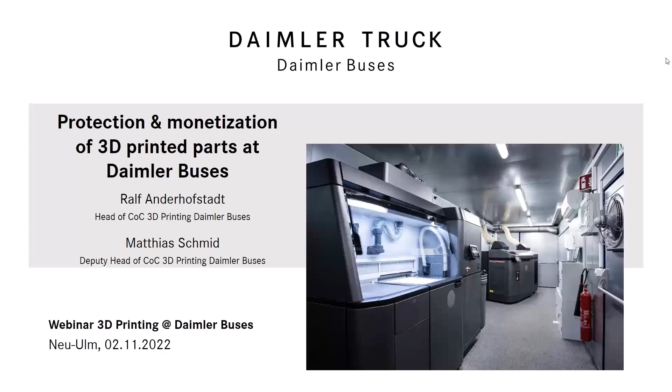Maybe I should start with what is the Daimler Truck AG? By the end of 2021, the former Daimler AG split into 2 independent companies. On the one hand, now we have the Mercedes-Benz Group AG for luxury passenger cars. And on the other hand, we have the Daimler Truck AG for commercial vehicles, with a clear and sharpened focus on transportation and transportation customer needs.

As the world's largest and globally acting OEM for commercial vehicles, we know about our global responsibility regarding sustainability, and it's our vision and ambition to be leading in sustainable transportation, and not only in transportation, but sustainability itself.

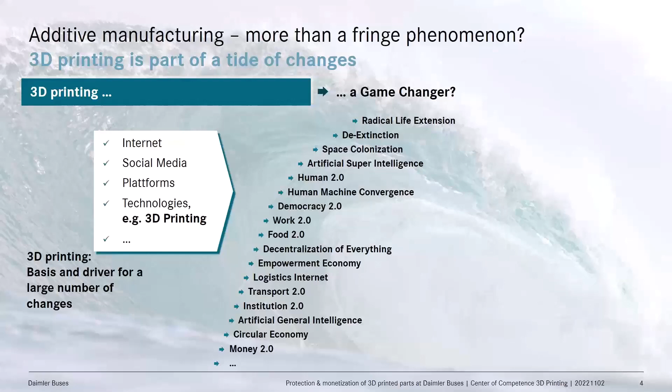How does that go along with 3D printing? Nowadays, we see a huge tide of changes in society, either in the way we live, the way we work, or the way we think about many things. For some of those changes or megatrends, industrial 3D printing, or I think additive manufacturing is the better expression, is basis and driver. It's way more than a fringe phenomenon, especially for decentralization of everything. In our case, for the decentralization of production or transport 2.0, to name just two of them.

And this offers lots of benefits. Industrial additive manufacturing helps companies save a lot of time and money because of the short manufacturing time and the toolless production. It's possible to produce parts on demand. For example, the average spare part can be produced within 24 hours, which helps you reduce your stock. Also, you can produce parts without minimum quantities, which is a huge economical benefit. And if you decentralize your production, you can also reduce transports and much more.

Now that you know the key advantages and possibilities of additive manufacturing, I would like to give you a short overview of our center of competence before we deep dive into the decentralized production.

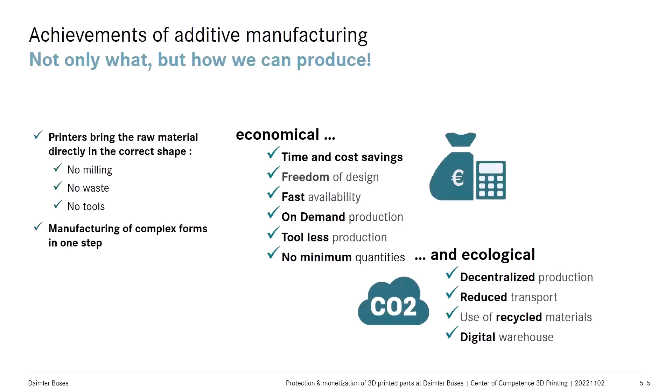At Daimler Buses, in our center of competence, we have a core of 6 teams that work after the Scrum method and cooperate with a cross-functional project team with over 30 different entities. For example, the legal department or tax department, IT, design department - the end-to-end product life cycle is covered.

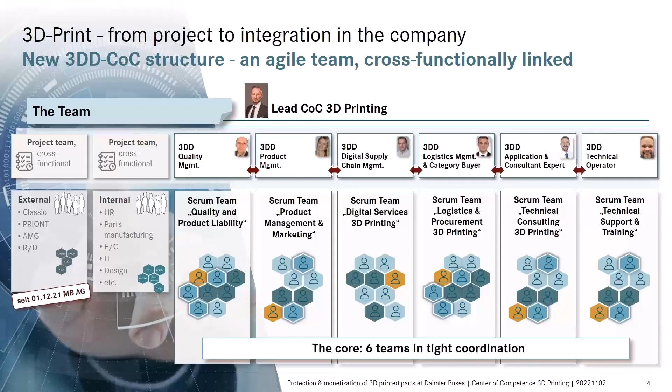Since we started with additive manufacturing back in 2016, we had one target: to establish and expand a new business model.

For integrating 3D printing at Daimler Buses, we followed the approach: think big, start small, and move fast. We had to recognize the whole potential of industrial additive manufacturing, and then find the right application to solve an existing problem or a problem which will arise in the near future.

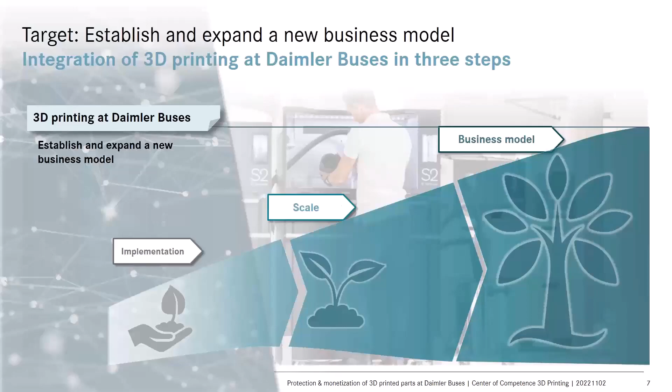And one thing that we identified was a new digital business model by decentralizing the production.

We give our customers the choice. They can still order a spare part like they're used to, or they can order a license and print the parts themselves. Or if they don't have their own printer, one more interesting opportunity is that our customers can get the parts printed by a printing service provider nearby their workshop, for example.

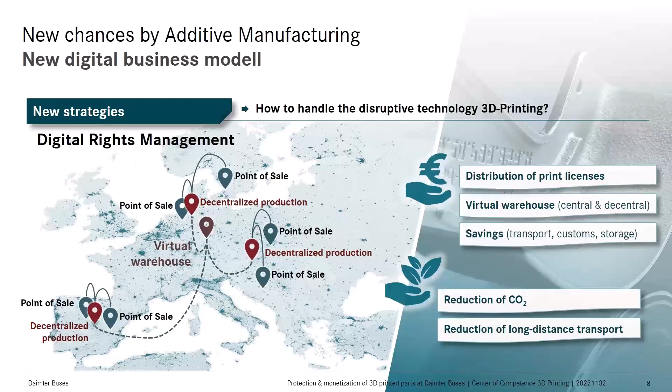So you can avoid long distance transports, can reduce carbon emissions by distributing print licenses instead of spare parts. But what does that mean for our existing supply chains?

This is a classical model of the existing supply chain with the normal stakeholders and roles. Start with the OEM, which is the IP owner, and the tier 1 supplier, which is producing the parts, ships it to the OEM. We, the OEM, are shipping the parts within our service organization, for example subsidiaries or dealers, which resell the parts to our consumers, to our customers.

So the tasks in this whole supply chain are pretty similar to each other, and the challenges for each stakeholder also. But by analyzing the supply chain, it's not important which is the stakeholder - what you need is the roles. So we identified for us 5 supply chain models.

As you may see in the blue box, we have classical physical supply chains, where after a spare part is produced and handed over to another stakeholder in the supply chain, there's always a physical transport. This is why we talk about physical supply chains.

For the future, we identified digital supply chains, where we send, for example, CAD files, or our intellectual property to a dealer or a customer that produce the parts themselves. In the best case, our producer and consumer are one and the same person - we call it the prosumer.

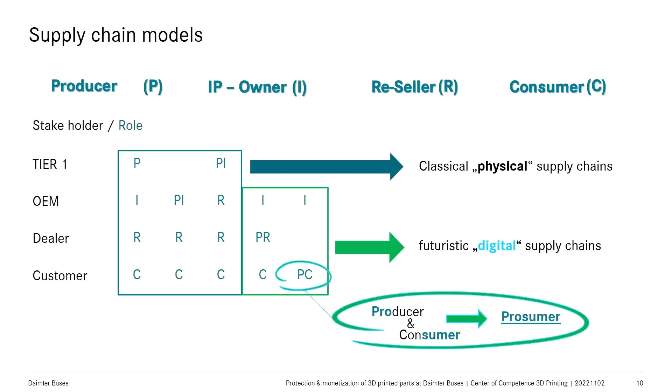On the first look, it seems like our prosumer model is really only interesting for the IP owner, because he can reduce running costs for his service organization by eliminating a reseller or a whole distribution level. But it's not only the IP owner that benefits from it.

Also, our consumer has a lot of advantages to this, because his parts are longer available - because if you have the relevant data and license, you can print the parts for several years, as long as you have a certified printer.

You have more impact on prices that you can achieve, because you don't have to pay all the stakeholders in the supply chain.

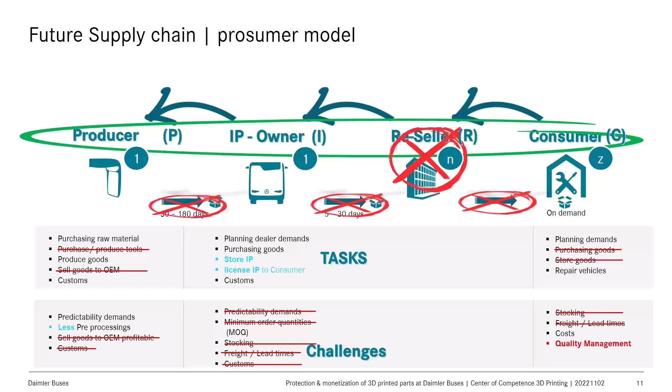One problem or fact is that supply chains are trust-based. In the standard supply chain, you have a one-on-one relationship between producer and IP owner on a contractual basis, and the IP owner or OEM normally has a contractual basis with his resellers. So if a producer starts a gray market or delivers parts to a gray market, it's pretty easy to identify the one who sent parts to the gray market.

But if we take a closer look at the prosumer model, of course we also make a contractual basis with the prosumer and the IP owner. But through the increased number of producers in this model, it is not really easy to handle, to audit, and so on, all these producers. So therefore we need a technical solution to protect our IP and avoid a gray market.

And this is what we have done with WIBU and Farsoon. There we store our 3D printing optimized data in our digital warehouse, then encrypt it, put it in our license shop, where our customers can buy the printing licenses and print their parts on a Farsoon printer, and then get the final spare part.

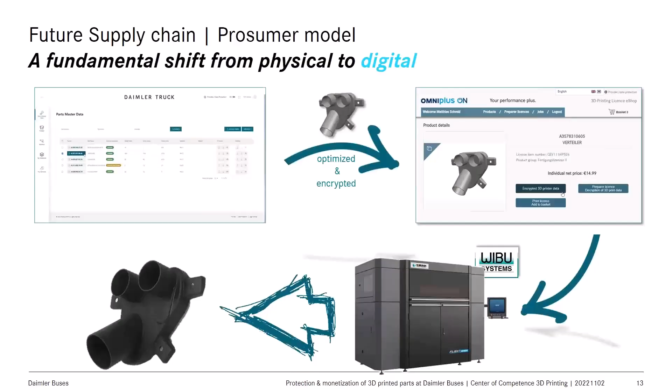That's when I would hand over to Stefan Bamberg. Thank you very much, Mr. Schmid, for explaining that high-level view of Daimler on all the business models and the opportunities we have in the additive manufacturing market. Let's now have a closer look at the technical preconditions we have.

We are very happy that Daimler Truck has selected the CodeMeter technology as a digital rights management system. Please allow me just two slides to explain to all the people here who WIBU-SYSTEMS really is.

We are located with our headquarters in Karlsruhe, Germany. You see here our wonderful buildings. We have more than 30 years experience in the software protection and monetization market. We have more than 130 employees working worldwide for that. And we have more than 10,000 customers in the world with millions of licenses out in the field.

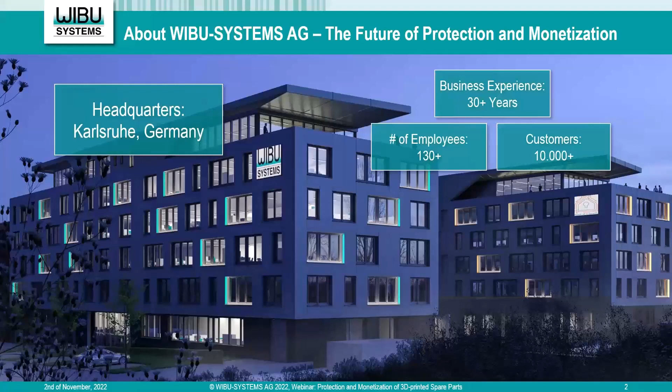We are completely focused on these three topics: the protection of software and data, the monetization, meaning licensing for our customers, and security. Related to that is what we offer for software protection and monetization.

Since this is a niche market, but a market that is very interesting for all the customers in the world who create their own software or have devices they sell into the market that are also controlled by software, we are acting worldwide and have several offices all over the world. We have one in the United States, one in Europe, and now three in Asia, two in China and one in Japan.

And it shows that this topic of digital rights management is a worldwide interesting topic, because you have to consider whether to do it on your own or to buy a professional solution for that, and that's exactly what we offer to the market. But what do we exactly offer to our customers?

So this is the typical process of our business. You have software that you want to protect, so we deliver our customers libraries and tools to encrypt their software and create licenses, with which the end customer is later able to decrypt the software again according to the licenses they have bought.

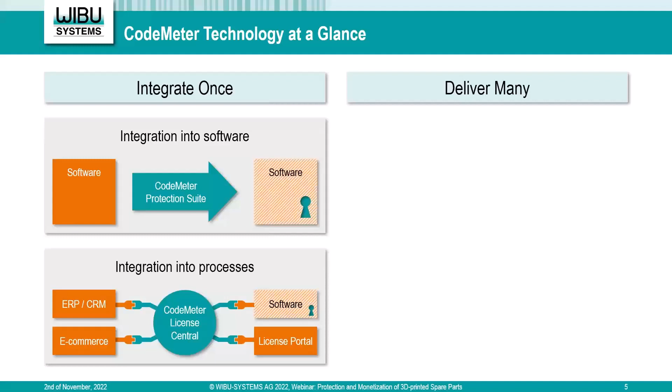And on the other hand, we have the integration to the process that I mentioned before. You can integrate our CodeMeter License Central, which is the central software server application to create licenses, to deliver licenses, and to manage licenses on one side into an existing ERP system or an e-commerce shop. And on the other side, to allow the end customers to achieve the licenses that they have bought in a secure way on every system they needed. And that is the integrate once, because you do both parts once in a time, and you deliver later on your software many times with many different licenses.

So the ideal process is that you have one software package that is the same for all your customers, and with these licenses, you manage which functions a certain person is allowed to use of your software. So we have differentiation between the licensing mechanism and the protection of the software. You can deliver the same software to all customers, but the software does not care about the license models. And so that gives you the flexibility to change license models for different regions, for different markets, for different customers, but you do not have to change your application itself. It stays the same wherever you deliver it, but with the licensing, you are able to control which functions, which parts, which applications can be used by the customer.

We offer that. We started 30 years ago with the dongle business. So we have really USB dongles and even parallel port dongles in the early times. This is still on the market because it's the best and most secure way to store the encryption keys. But in the meantime, of course, we have plain software activations that are not bound to a dongle, but to the hardware of a PC. And of course, for the future purposes, we have cloud licenses as well. So it doesn't matter which one you want to use. It's the same for all, and you can use it for the different license models we have with different license container types.

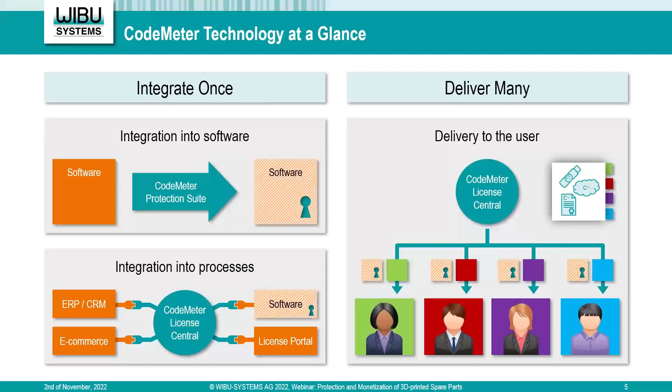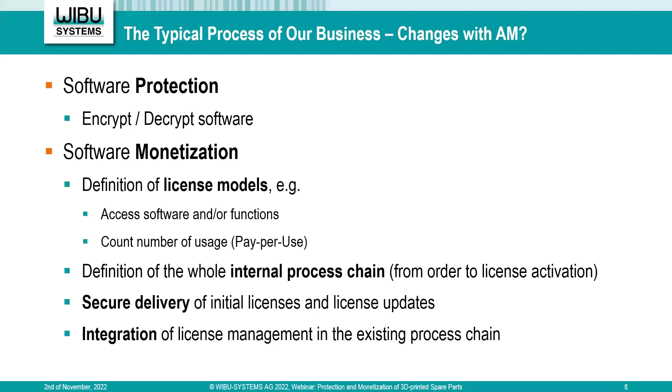And if we go back, because I want to close that circle to the 3D part, we have the same slide like before. So we have the software protection, the software monetization. And if we have now such spare parts, we have a CAD model that has to be prepared and secured. And that means then we can take the same steps like before, but instead of protecting the software with standard algorithms, we just protect data. And this is exactly the same. If you protect software or data, from our perspective, it's the same. So we can use that for encrypting the content of such a file.

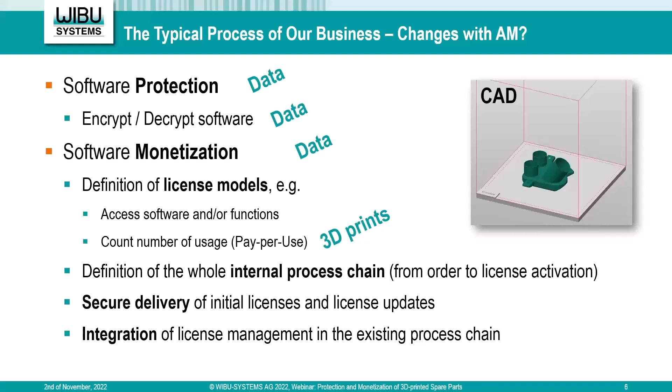And when we have a closer look to the license models, you see that we have the pay-per-use model, which is perfect for how many times you can print such an object. So you need a license for preparing that file, and you need a license to print it on the printer later on. The other process steps, the definition of the internal process chain, the secure delivery, and the integration of a license management in the existing process chain stays completely the same. There is no difference between sending out software or sending out just data, which has to be protected. So it's the perfect way to use our already existing technology for this purpose, to have digital rights management in the additive manufacturing industry. No need to change anything, just to adapt it to the needs of this industry.

That is the reason why we have that wonderful partnership with Daimler Truck and Farsoon Technologies. The goal was to digitize the worldwide spare part business, but we are revolutionizing this instead, because we think that is the future of the spare part business: to sell spare parts as licenses, with no logistic ways and no real production necessary. You have your printer and you have the spare part wherever you want it, wherever you need it in the world. Let's have a closer look at the overall process.

So we have the step to prepare the data of that object first, to secure it by encrypting the file. Then we have a cycle that starts with a customer buying that part in the e-commerce shop. He downloads the part information and the necessary licenses he needs to pre-press and print the object. Then we have the print process itself, where we have to control how often a customer or end customer is allowed to print such a part, and that is done over and over again.

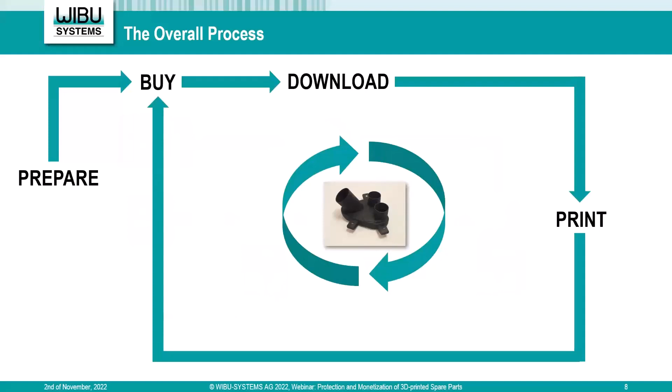So that shop brings everyone in the world who needs spare parts into the position to buy parts whenever he needs them, and in the amount he really needs. Not 10,000 - if he needs 5 pieces, he can buy 5 pieces in the shop and then print it. That is the overall process we have in mind when we say revolutionizing the digital spare part business, because we have the underlying technology here. You see we have the same things: prepare, buy, download, and print.

This is the overall view of all the systems we have in place. Starting with the prepare part on the left side, and the shop system where Daimler Truck customers can buy spare parts, we have the download part and the print part. Let's now have a closer look at all these parts, which, by the way, use standard CodeMeter technology. You see we have the CodeMeter core API integrated in the several software packages.

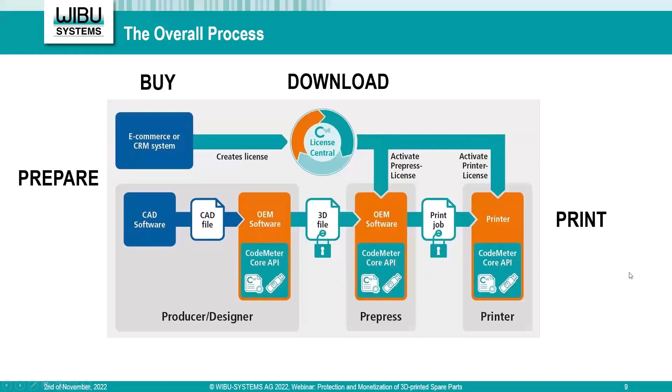We have the possibility to use dongles or software licenses. Of course, software license is the easier usage because you do not have to deliver any hardware components in addition, but it's possible even with the cloud solution as well. So we have these 3 steps, and let's have a closer look at them.

The first one, on the left side, is the OMNIplus 3D printing licensing eShop. Here you see an air distributor that is available in the shop system for download, and we have 3 parts here. You see it in German, but I can explain it nevertheless. This is the download button for the 3D data that you need. In the first step, all these parts available in the eShop are encrypted based on CodeMeter technology.

Whenever you download the data, it is encrypted - you cannot use it in any way. You need, in addition, several licenses, and you can buy these licenses in the e-commerce system of Daimler Truck. With the License Central that I mentioned at the beginning of my presentation, you can deliver these licenses to the ones who need them. And that is the special question: who needs that licenses?

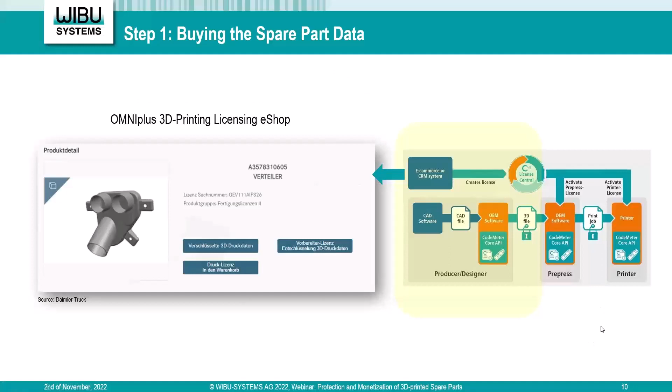We have 2 additional stakeholders here. On one hand, there's the pre-press people who need to establish the print job at the end. So they take all the objects they want to print and place them in the chamber room of such a 3D printer. Here you see just one part - this is the air distributor I mentioned in my slide before. But of course you put a lot of them into that chamber room because you want to optimize that printing process. It takes long, and you have to spend the money to print it.

So it makes sense not to have only one part in the chamber room - you have the possibility to have a lot of them in that room. It can be the same one several times, there can be different ones, there can be protected ones and unprotected ones. We take care of all these cases.

We have the wonderful situation that Farsoon Technologies also believes in that new market opportunity. So they integrated our CodeMeter technology in their BuildStar software, which is the preparing software for such prints. They had to integrate our technology as well.

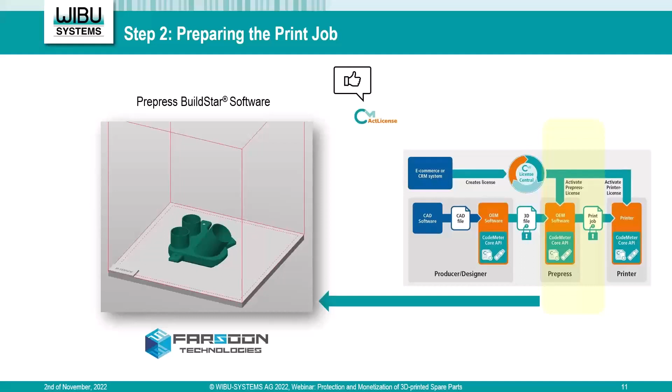So if you download the data of that piece, you also need the so-called prepress license to be able to use that part, the encrypted part, in that software. So that's the one license you need, the prepress license.

And last but not least, the printer control software also needs the integration of CodeMeter. Here we have the same situation, that Farsoon Technologies also integrated our CodeMeter application in their MakeStar software. On one side, to decrypt the print job, because after prepress the print job is again encrypted, and you need a license to decrypt it on the printer.

And we have a counter in that license that is able to securely count how often such a piece can be printed on the 3D printer. It's a so-called certified 3D printer, because it's the one that is able to handle such encrypted pieces.

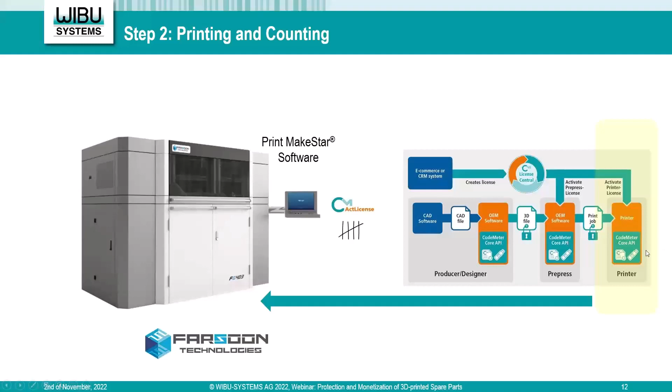And that is the third part that needs to integrate CodeMeter: starting with the producer and designer with the encrypted parts, the prepress software where you can create a print job for a 3D printer, and last but not least, the print job itself that is printed on such a printer.

Let's have a look at the distribution of such licenses. We have our standard mechanism where the License Central is in between. So we have the CRM system of Daimler Truck, or the e-commerce system, both connected to the License Central.

And we have the user on the other side: the one who needs the prepress license to create the print job, and the one who has the printer software on his printer to be able to print it and to control how often he can print it.

And this process works as follows. An order comes in from the e-commerce shop, and the License Central creates a so-called ticket. A ticket is an activation code that is delivered to the customer via the shop system. It's a number or digit string, long enough to be a very good password, because it's nothing else than a password.

With this password, the user - the prepress person or the printer person - is able to download these licenses onto the corresponding systems. This happens just by entering the ticket, creating a fingerprint on the system together with the ticket. You get back a license file which only works on the system where this fingerprint comes from, due to security reasons. Then you have the license available on the system to be able to work with it or to print it.

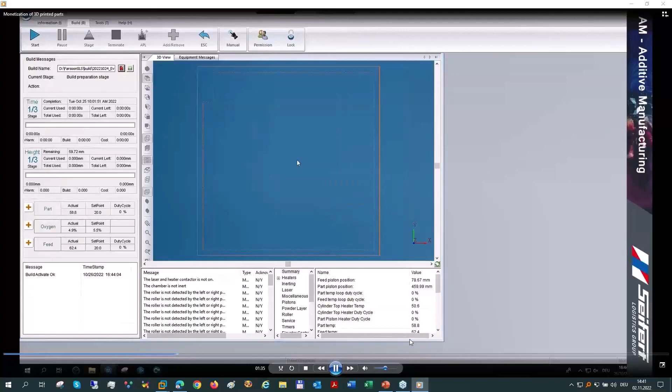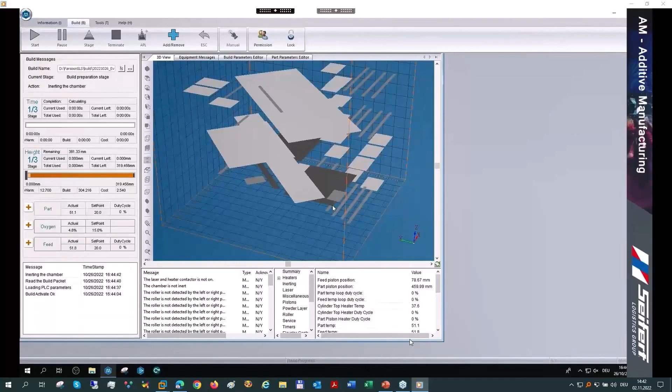And in the next step, you see how they work in the software of Farsoon. They open the protected part, and they are able to use it because the license is on their system. They have located everything in the chamber room, and push the button that finally sends that to the printer.

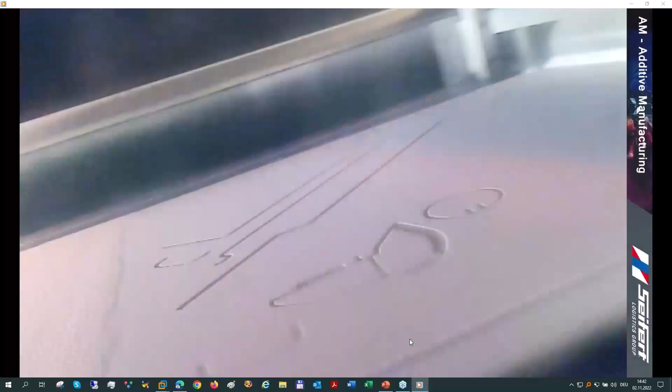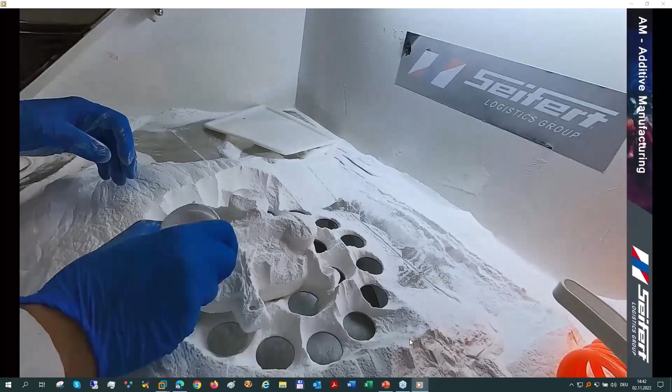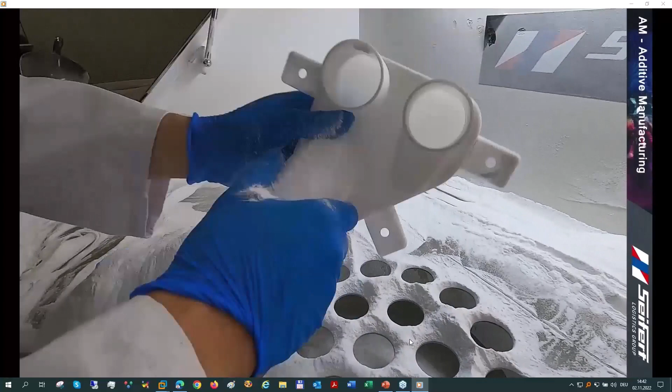And that is also done in a secure way. And now we see the print job itself, just to have a little bit of connection to the real life. So you see the part is now printed in such a certified printer of Farsoon. And after a while, you have the nearly ready to go 3D part. You see you have to get rid of the powder that is created during the print process. But you see here is the air distributor.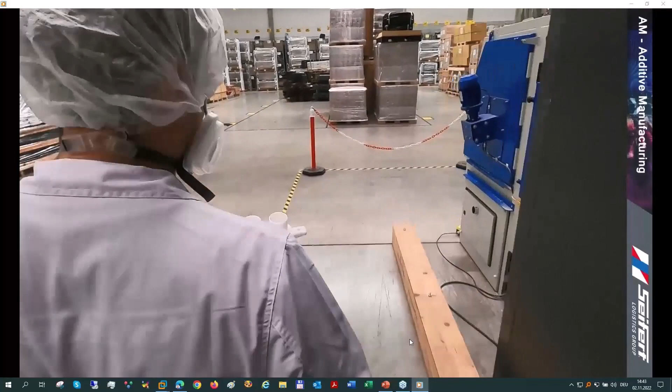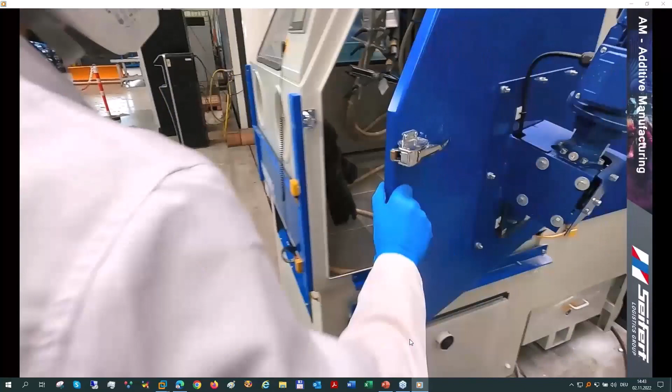And in a very final step, the powder is completely cleaned. So there's a new device for that. And with that final step, it's now cleaned up. You have the 3D part in your hands.

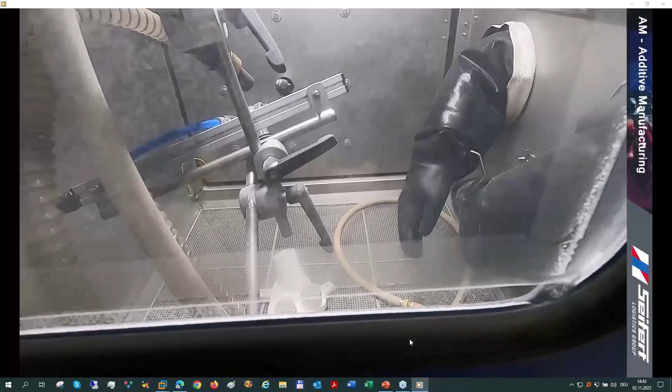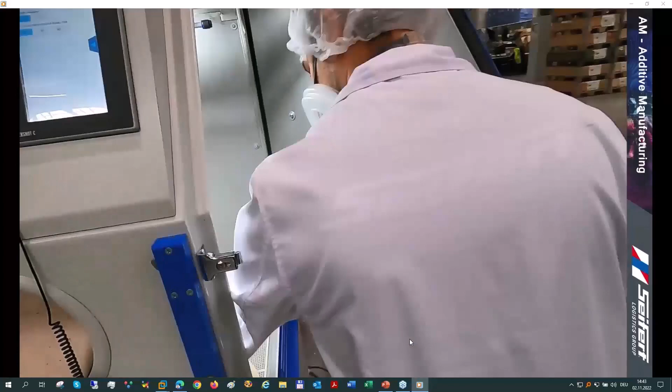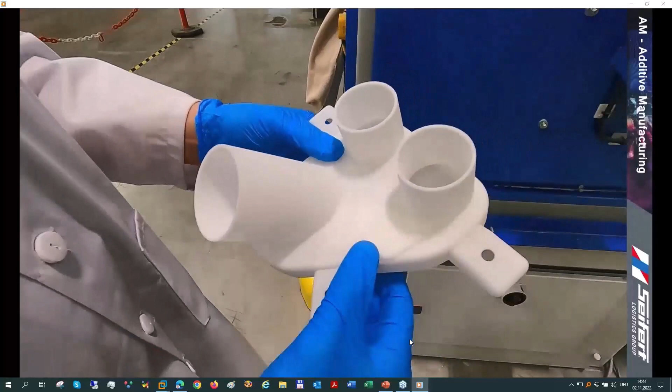Just ordering from the OmniPlus e-commerce system from Daimler Truck, you have the part in your hands wherever you are in the world, whenever you need it. Just by clicking some buttons, and of course having a Farsoon printer in your own company, or your service provider having such a printer in his portfolio. So that is what I wanted to show you about the real life.

And I want to finish my presentation now with some challenges we face. So, of course, we have in any case to involve different stakeholders, as I mentioned before.

So I have the part vendor, we have Daimler Truck, which needs to integrate that in their e-commerce system, and the preparation, meaning the encrypting of the part, has to be done by the part vendor. We have the pre-press software vendor in place, because he has to integrate the CodeMeter technology to make sure to be able to use that encrypted part in the pre-press software.

And finally, we have the 3D printer vendor that integrates the technology in the printer controlling software, so that on the one hand, the encrypted print job can be decrypted, and on the other hand, to count how often such a part can be printed, because that is the point that is clear before you print it, not after you printed it. So all of them have to integrate the CodeMeter technology to ensure the security chain from the shop to the printer.

Then we face the challenge, when is the 3D part completely printed? Is it printed 100% ready? Is it printed 95% ready? Because you can stop, of course, such a printing procedure.

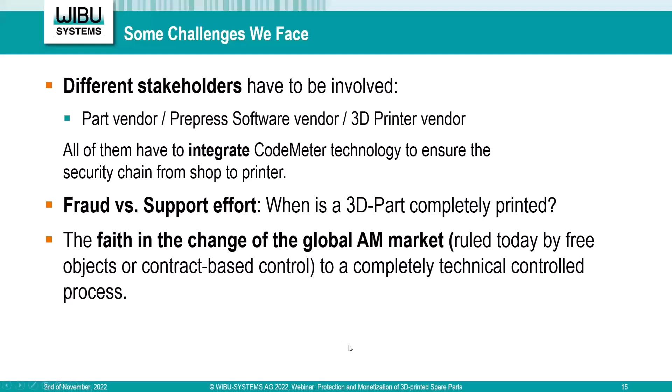So just a small summary: we think that 3D spare part printing will be a fundamental way to get original spare parts in the expected quality wherever and whenever the parts are needed in the world. And this is indeed a revolution to that market, because it's not really brand new, but now we showed that it is really technically possible to do that.

And the market of 3D printing service providers is expected to grow, because not every company will have a 3D printer available, but you will have a lot of 3D printing service providers all over the world that offer this service to print such objects wherever you are in the world. And you have to make sure that the intellectual property rights of the owners are still in place, not only by a contract, but also with a technical control.

The great thing is that the existing and market-proven CodeMeter technology can be used for that, because, as I said before, it's the same story with data as with the software protection that we have been doing for decades with a lot of large customers in the world, showing that this technology works based on standard encryption and decryption mechanisms, but with the additional benefits that we offer together with the toolchain to encrypt and decrypt, and with the monetization possibility based on our flexible license models. And so we think it's a very good and perfect technology for the additive manufacturing industry when we look at 3D printing parts and the protection of intellectual property.